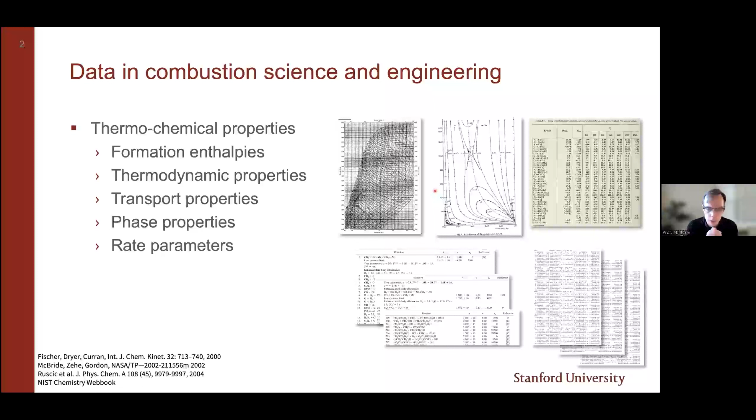This moves on with the traditional NASA tables, which are extremely popular for a wide range of numerical simulations, where we now have access to polynomials up to 7th, if not 14th order accuracy to describe very complex fluids. If we are looking lastly to chemical mechanisms, we are currently at a stage where we can describe fairly complex fuels at sufficient accuracy with extremely large and detailed chemical mechanisms that have upwards of several thousand parameters. So this is essentially a manifestation of the availability of data, and we want to embrace this and see how we can utilize this.

Moving on, not only do we have data for thermodynamic properties and characteristic fluids, but we can also think about the characterization of systems, system behaviors in the context of sensors and actuators. A simple example that I pulled here from the literature is that current operational systems, and this includes gas turbines, automotive applications, power plant systems, and so on, are heavily equipped with sensors for various applications. This includes health monitoring, optimizing operating conditions, mass flow measurements, and so on.

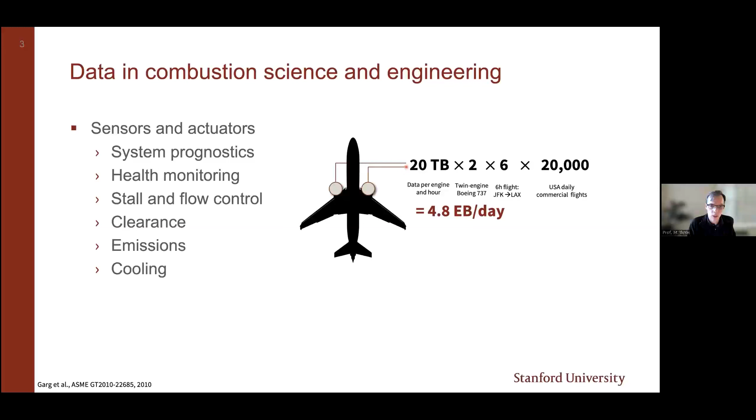A simple example is if you're looking at a cross-Atlantic flight or an international flight of a commercial aircraft, you're generating several terabytes of data at a very high acquisition rate. So this means this data can be utilized and incorporated in our corpora of data for data analytics.

Moving on, beyond this, if you're looking at prevailing environmental impacts, most notably wildfires, which are prevailing here in the western part of the US, there are sensors in the form of satellites, observational data, and so on. And they're equally generating large amounts of data where we're getting aerial views over different fuel properties, vegetation, moisture, humidity.

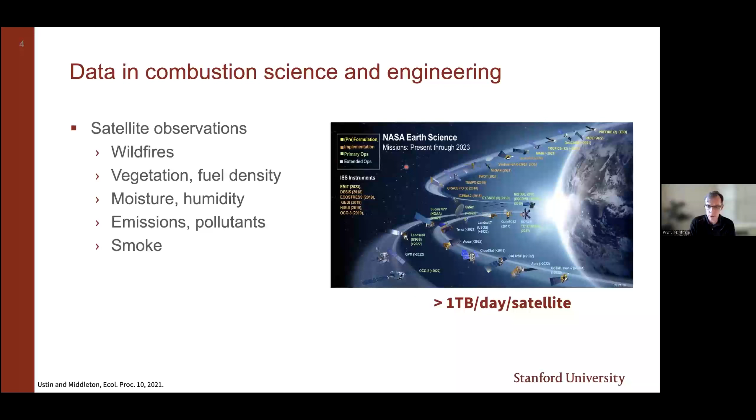And this is, again, data that we can take advantage of for certain applications related to combustion, here in the context of modeling, predicting, monitoring wildfires, and so on. So this is, again, another area. But most importantly, if you're also looking at simulations, this is really at the heart of our problem here.

Simulations from direct numerical simulations, as well as large eddy simulations or high fidelity simulations. If you're looking at the accumulation of data over the last 20 or so years, illustrated here, this is the size of the DNS data, really how many bits we are generating on an average rate. You're seeing that this continuously increased over the last 15 years. We're currently in a plateau for several reasons.

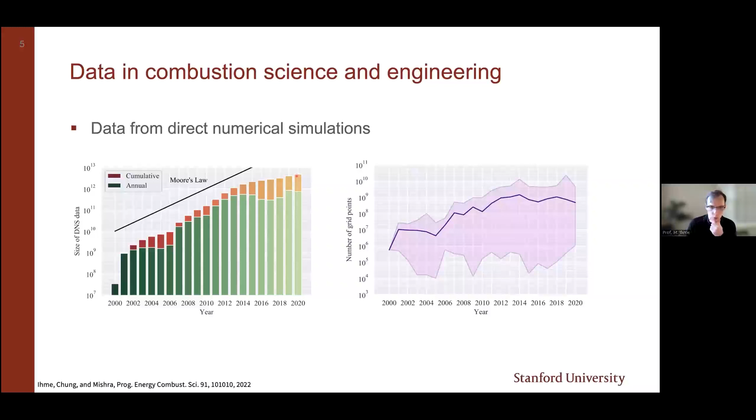But what it tells us is that we can take advantage of this data, and this is certainly several terabytes or petabytes of data that we have access to for data analytics. So by and large, there is clearly evidence that data is available that we can embrace and that we can utilize. But what is the challenge? The challenge is really summarized here on the next couple of slides.

Another issue which becomes prevailing is data access, and I will be talking about this later on. Yes, this data is there, but it's currently typically heterogeneous and distributed, and accessing this data is somewhat limited. And the last aspect, which we cannot forget and really have to recognize, is that there is certainly a prevailing domain knowledge. Our combustion community has been driven by physical intuition, by expert knowledge, and we certainly want to embrace this and utilize this in our data analytics.

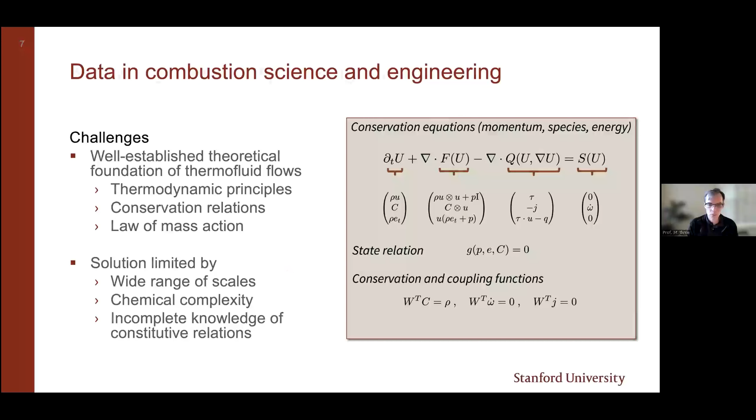So in the absence of data, as I said, we can really rely on our domain knowledge, and we can construct physics-based models. And we have done this over recent years quite successfully, I would say. In the absence of available knowledge, we can certainly resort to purely data-driven methods, but this comes at the expense that it requires very large sets of data, which are currently not accessible at the stage that we would like to see.

And as a combination of both, if we have a limited set of data but still would like to introduce our available knowledge, we can introduce so-called knowledge-guided data-driven methods. You can really think about this as augmenting our data-driven approach by physical intuition or by domain knowledge in an attempt to achieve physical consistency, to improve the generalization, meaning in the absence of data, I can still rely on my physical principles. I can reduce the amount of data, and with this get overall improved performance of my machine learning techniques or my knowledge-guided methods.

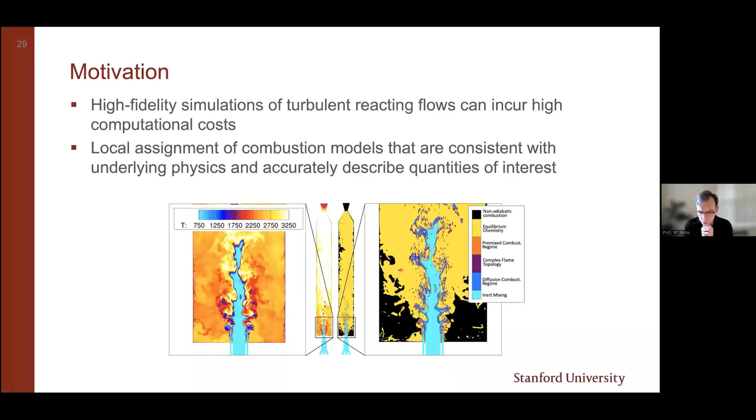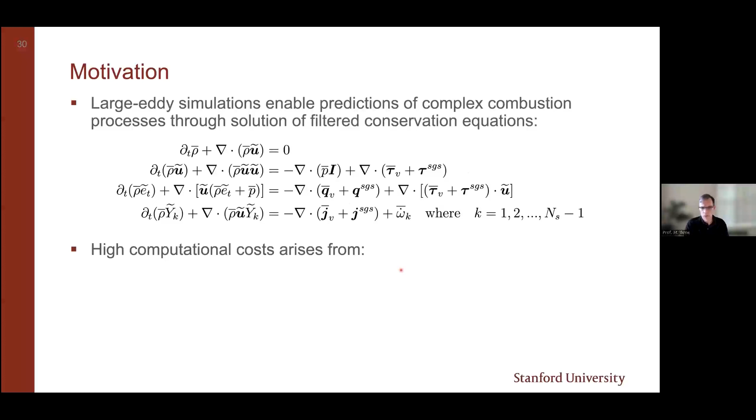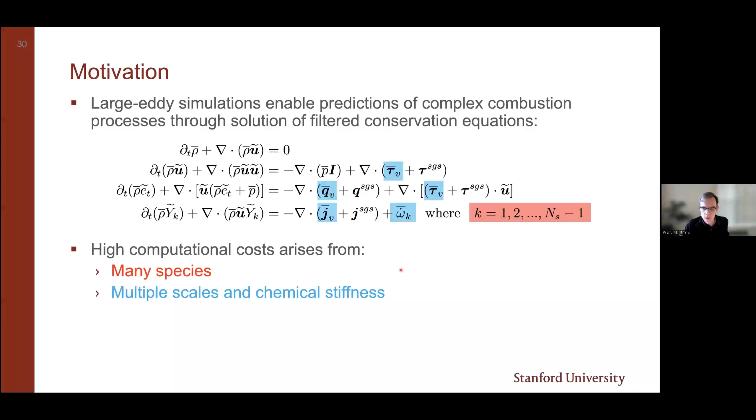But what we can think about is we can take advantage of the different combustion regimes by adjusting the model fidelity in such a way that we're tailoring this to different combustion problems. Right? And this is illustrated here. We're solving the governing equations. The high computational cost arises from three sources. The first one is the number of species. The second one is the scales and the chemical stiffness, which arises from the viscous and the chemical source terms. And the last aspect that I will address later on is the closure model. In many cases, those closure models can incur additional computational cost or are simply not known. So in this case, they would also introduce additional numerical errors.

So what we can do here is we can pull models from our existing literature, and they are quite rich. I would like to categorize them into topology-based combustion models. These are simple models which take advantage of the underlying flame topology. Many of you are familiar with the concept of flamelet type combustion models. As I said, they are computationally very affordable, but they come with a price that they lack physical expressiveness and

complexity. In contrast, we can use so-called topology-free combustion models. These are, in this case, finite rate chemistry simulation models. They are fairly accurate, but they are, of course, more expensive since I'm solving a larger set of chemical species.

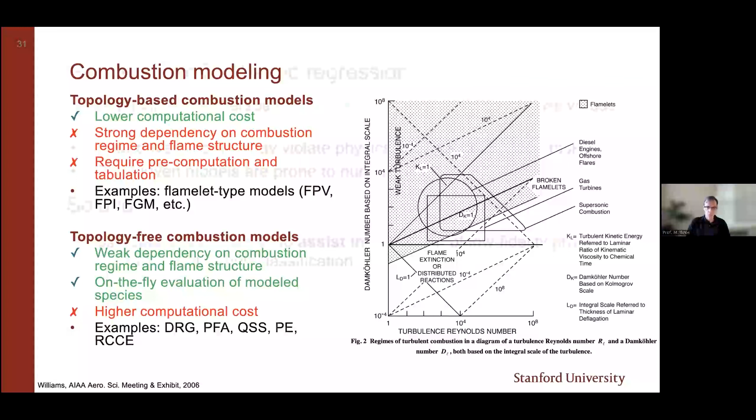So what I'd like to do here is to see whether we can combine different combustion models which have different physical fidelity, and in this case also physical accuracy, in such a way that I can improve the overall predictive accuracy. And I want to do this by using machine learning methods. Here, I want to identify a machine learning strategy that allows me to classify different combustion regimes.

And this is illustrated here. I'm showing here two simulations of this rocket combustor. The figure on the top is a finite rate chemistry simulation, where we're essentially solving the detailed transport equations for the species. In this case, this is the methane oxygen system. And at the bottom, this is a classical flamelet model. FPV stands for flamelet progress variable formulation. This is essentially a scalar mixing model.

And if you look into the temperature, the top figure is always the instantaneous result. The bottom is the mean results for temperature and carbon monoxide. You're clearly seeing that there are substantial differences in the flame lengths. Our flamelet model substantially underpredicts the flame length. We are having deficiencies in predicting the thermal boundary layer and recombination. These are all deficiencies of a flamelet model.

And what I'd like to do is to use machine learning driven, data-assisted classification methods so that it can select different models in different regions of my reacting flow field to overcome deficiencies of the flamelet model, but at the same time reduce the computational cost of my simulation.

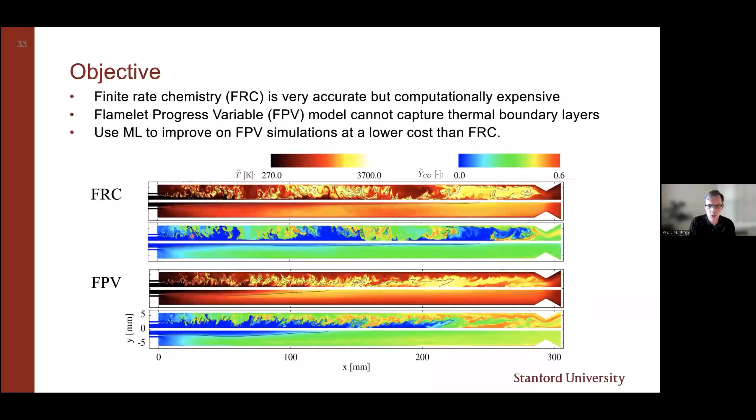The experimental configuration that we're considering is this TUM, the Technical University of Munich, GOX methane single element rocket combustor. This is an experiment done by Silvestri several years ago, and this is, I think, an ideal test case for our investigation.

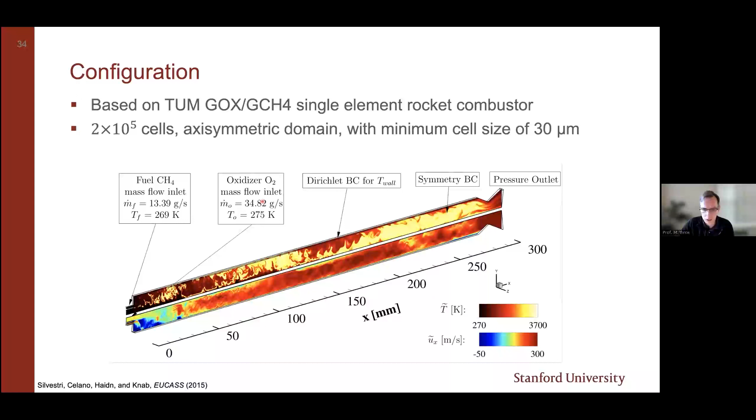The machine learning algorithm that we constructed is shown here. We are referring to this as a data-assisted LES simulation. In the first step, we're performing simulations using finite rate chemistry. Then we are introducing errors, and this is essentially the process for the data pre-processing or the training of our machine learning algorithm, in such a way that we can construct different features or labels from our simulation. They are based on a training feature set. In this case, this is a 6-dimensional input parameter space.

And what we are obtaining from this method is our random forest, which we're using here essentially as a classifier. So we are doing our simulation. We are identifying the different features. With these features, we're entering our random forest. And from this, we're obtaining different labels that identify 3 different combustion regimes. And based on the local assignment of each one of these combustion regimes, we are utilizing a different combustion submodel.

To go into a little bit more detail, the construction of the training labels and the outputs is done through this error function. This is, in this case, a maximum norm that is weighted with certain coefficients. In our simplest form, all we're really asking is that we can threshold our accuracy with respect to the finite rate chemistry, which in this case is our reference data set.

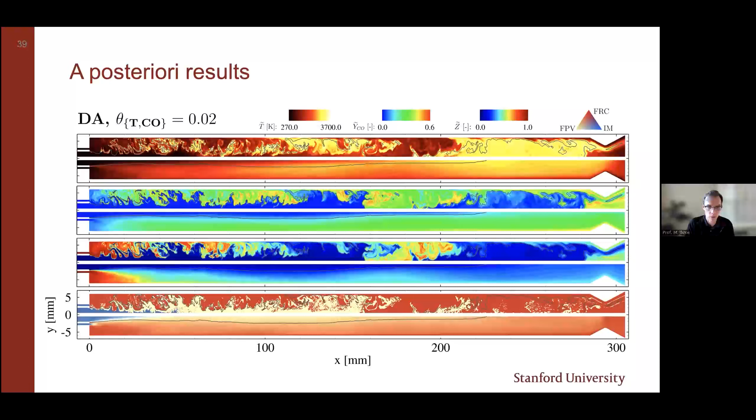In the interest of time, I want to skip over this figure here. What it really tells us is that this data-assisted combustion model is bounding the finite rate chemistry and the flamelet solution. We're getting reasonable reductions in the computational cost between 20 and 30%, depending on the accuracy requirements. And overall, the model is recovering a finite rate chemistry method based on this formulation, since it's a classical classification model, so that we are not extrapolating or violating any underlying physical constraints.

One result that I want to show you here, which I think is quite interesting, is asking the model to extrapolate beyond conditions that it has seen before during the training process. And for this, what we did is we trained the model for one operating condition and then employed this random forest at conditions for which it was not trained. And we achieved this by increasing the inlet velocity by a factor of 3, so that we're getting substantially shorter residence times in the combustor, and with this we're changing the mixing characteristics.

And what you're clearly seeing is that this model is still able to handle these extreme operating conditions, and it's doing this at the expense of reducing the assignment of the inert mixing and the flamelet formulation by just imposing a stronger presence of a finite rate chemistry representation, which you clearly see here in these regions, right?

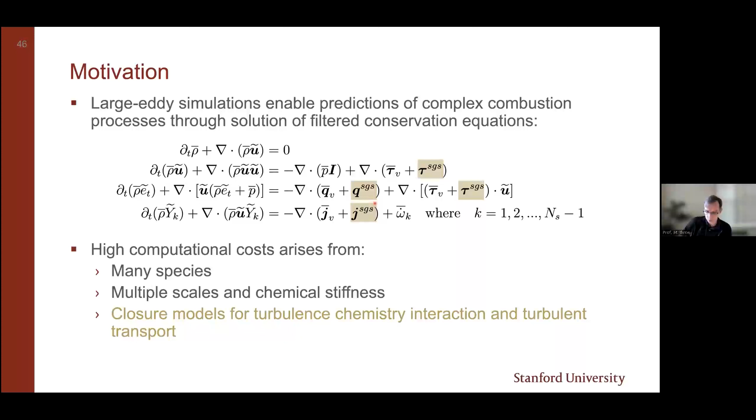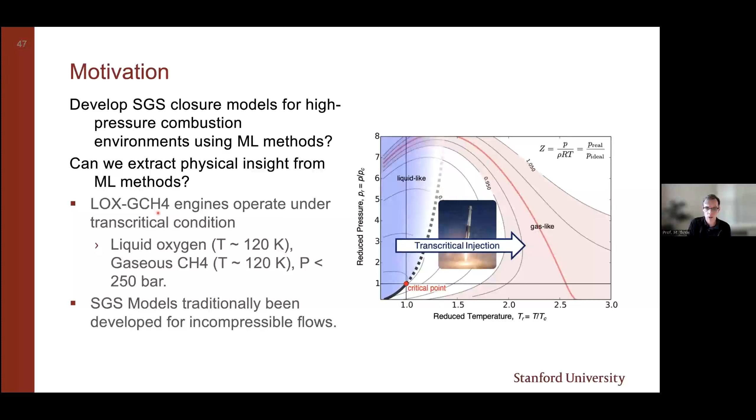Right? So to illustrate this, I want to stay in the realm of rocket combustion, high pressure combustion, where our available knowledge about constructing reliable subgrid scale models is essentially very, very shallow. So we're looking at a liquid oxygen, gaseous methane operating condition, and we can ask, how can I use machine learning techniques here to extract a physically consistent subgrid scale model that is reliable for these high pressure operating conditions?

To illustrate this, we are generating data in the first step. This is a DNS with about a 128 cube domain, illustrated here. This is a spherical blob of liquid oxygen embedded in gaseous methane at a pressure of about 100 bar. This is exposed to a turbulent environment, and with this, we're seeing the diffusion, the mixing, and ultimately the combustion process. What we would like to do is take this set of data that we're generating, in this case for 2 different Damköhler numbers, and construct a subgrid scale model for the turbulent stresses.

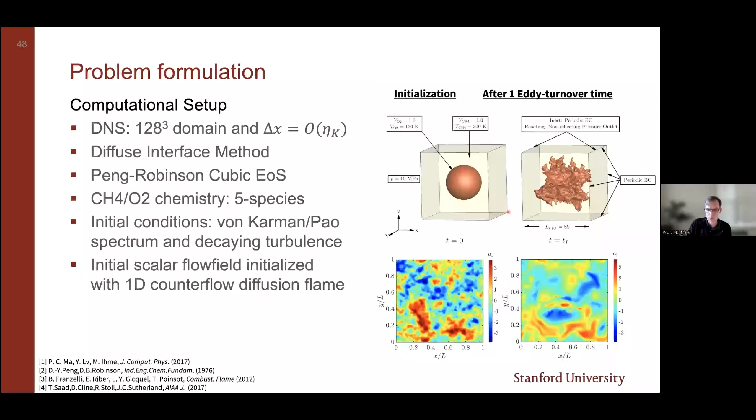In order to do this, since we're primarily interested in LES simulations, we are applying filtering to the systems at different filter thicknesses, which is illustrated here by delta. And from this, we can now construct the subgrid scale stresses. This is an exact form from this DNS calculation.

And ultimately, we want to find a functional expression that relates the subgrid scale stresses to input features, and this is the filtered velocity, the filtered gradients, and the second order derivative. And we try to identify this input-output mapping through a data-driven technique. We're using, again, a random forest for the reason that we take advantage of the expressiveness and the physical interpretability, which I think is here really a key asset of these methods, and we fully embrace this in our application.

I talked about the random forest already, so I want to skip this in the interest of time and just jump right into the model predictions. One key attribute of this is a Pearson correlation, which essentially allows us to assess the sensitivity of different quantities to the training data. So what it really means is we're asking which one of the features is most important for different applications and how accurate is each one of these systems.

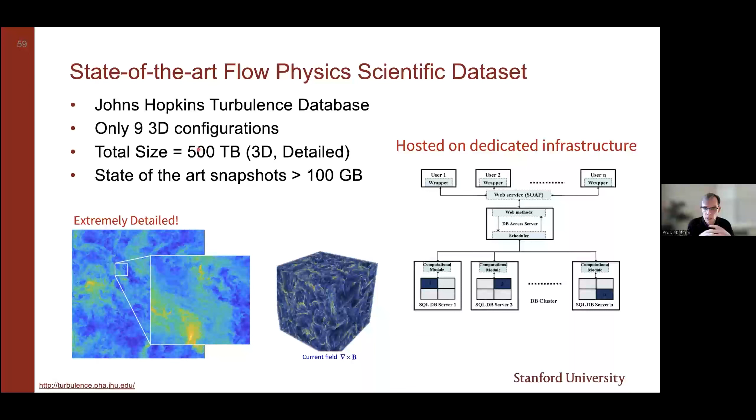And this is one example where we have data established on a common database, but this database is not meeting the requirements for machine learning because of the distributed data for different applications. And then the question is, well, how can we do this? And Tom came up with a cool idea, and this is essentially embraced here in this BLASTNet.

This is a community-wide web platform or framework that allows us to collect data from different contributors in a centralized database, but in a distributed data acquisition system. And we're using existing community services. It consists of 5 steps. Step number 1 is the collection of the data, and this is locally done. We can compress them or acquire them.

And here the idea that we are putting forward is that we're using existing open source commercial or public databases in the form, for instance, of Kaggle, which essentially provides about 100 gigabytes of free data access for each user. And this is essentially one proposition on how we can, as community, accumulate large data that is accessible to the entire user base. Step number 4 in this framework consists in the consolidation of these Kaggle databases into a metadatabase, and then exposing this to the different users who are interested in accessing this.

So this is essentially taking the principle of an ImageNet or an open community database, but recognizing that the scientific data that we are dealing with is much larger, much more complex. And there we have to essentially introduce an intermediate step that requires compression or a weakly distributed data net so that we can, as community, access this to a wide range.